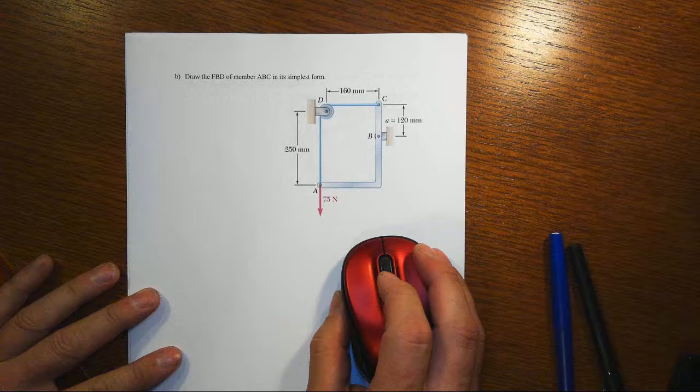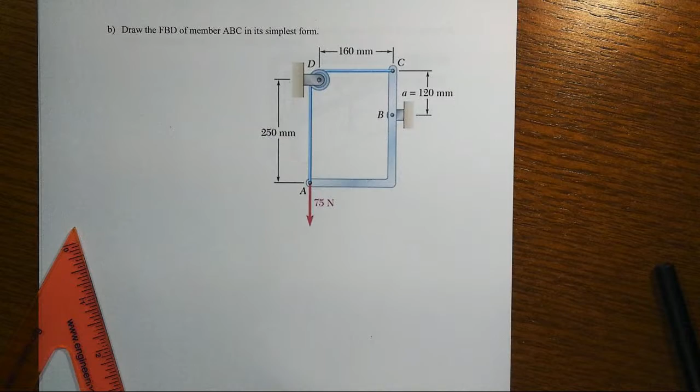Okay, in this item we're going to draw the free body diagram of member ABC in its simplest form. Now note, we have this cable that wraps around the pulley, and we're going to assume that the diameter of the pulley is negligible.

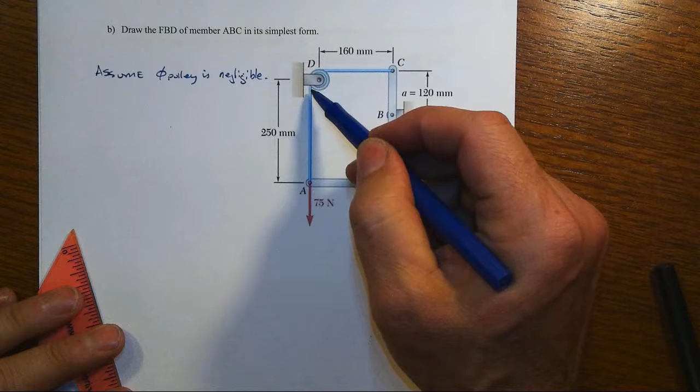Negligible. Why? Well, because look at the dimensions here. We don't know what the pulley size is, and if we don't know what the pulley size is, it makes some of these dimensions, the exact dimensions or the angles of the cable on either side, a little goofy and weird and not so certain what's going on there. So that's why we pretty much have to. We don't have enough information to do anything except for that.

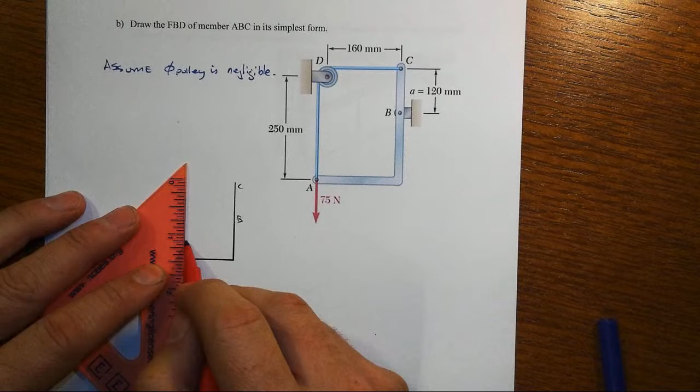Alright, so here's our bracket A, B, C. And we can start off saying, well, I don't know what's simpler and what's not, but what I do know is we've got a 75 Newton force. We have the cable ADC. It has to be in tension, so pulling away from the free body, it's going to have to be the same on both sides. And we've got then BX and BY.

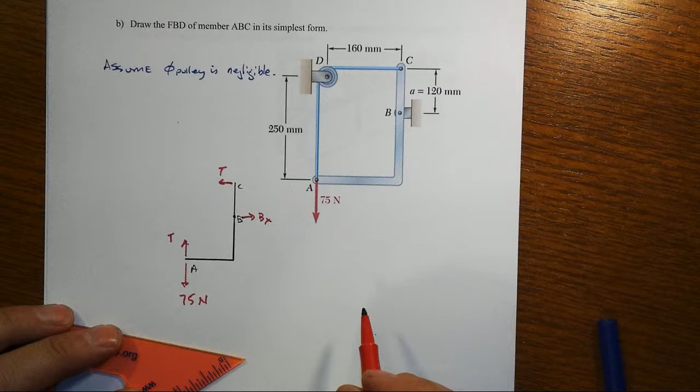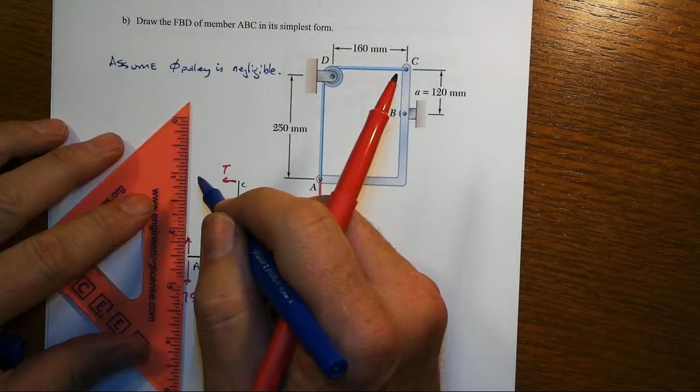Now, T up at C is going to the left, so that means BX has to be going to the right. And I think the resultant of the T and the 75 is still vertical, and this T is horizontal. I think these things, those two have to pass through point D. Now that's why I say we neglect the diameter of the pulley, because that point is somehow lower than that where that force is at.

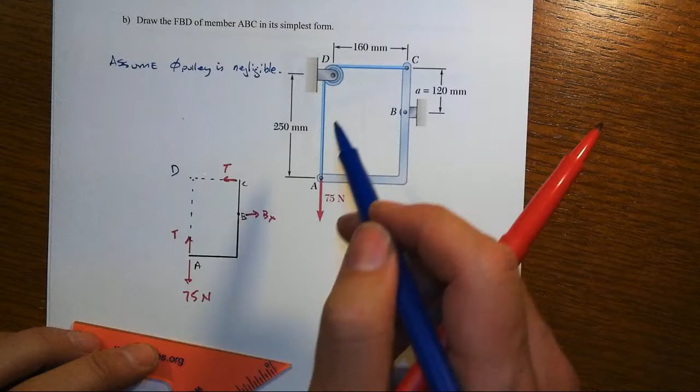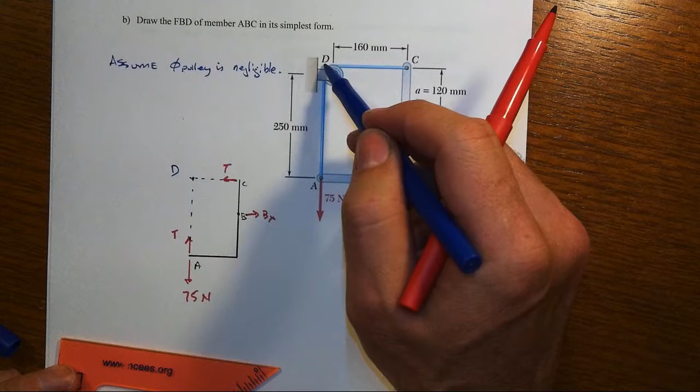So I guess you could argue that 75 and the cable force has to come up here. It really doesn't matter where that point is at. We have to intersect right up here. Again, ignore the diameter of the pulley and then don't have to worry about these kinds of things.

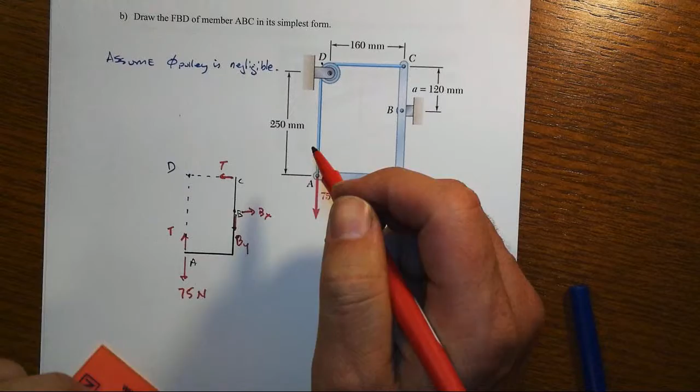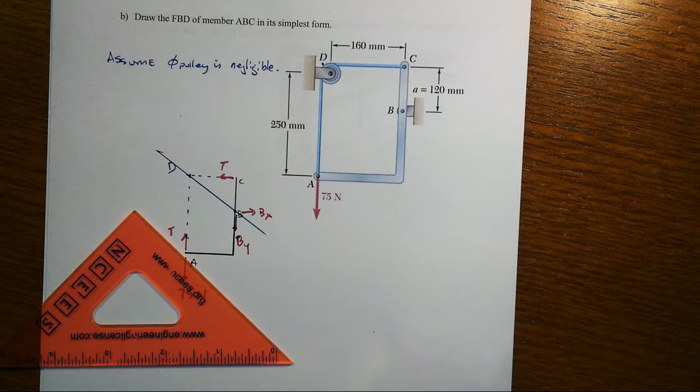But look what's going to happen. BY is going to have to be going down, and because the resultant of BX and BY must follow the straight line that's between B and D. This is a three-force system, in other words. Force down here, a net force that's different than the one here. Their lines of action intersect at D. These two resolve into a single force, three-force system.

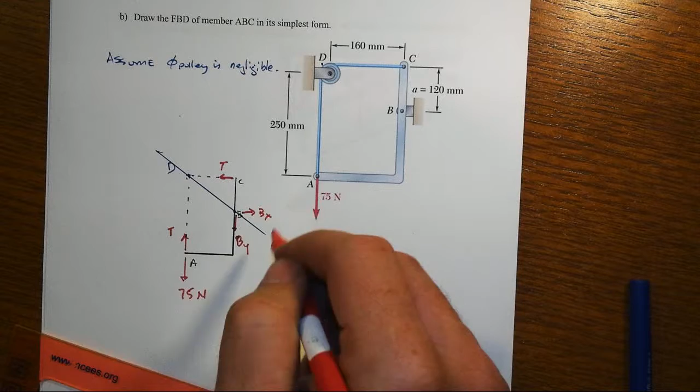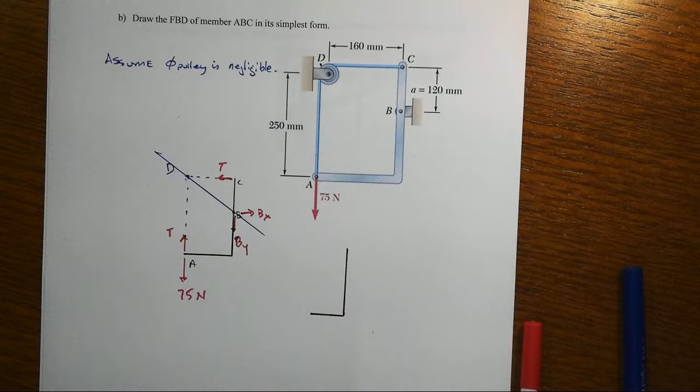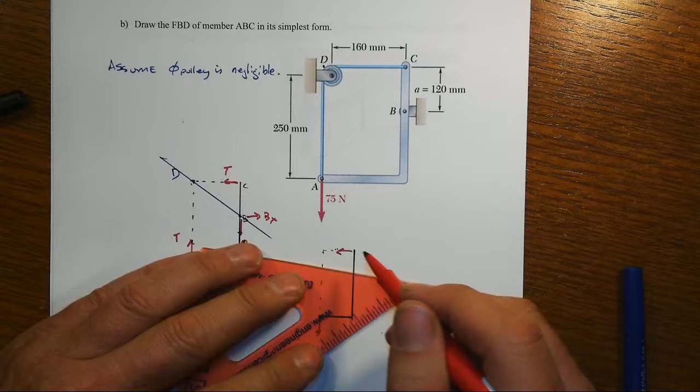If those don't, then when I sum moments about that point D, that whole thing is going to somehow spin. So the simplest model, I guess, let's just put it into a tight little answer, is going to look something like this. I'll have some sort of net force here. Don't know what it is. Have a net force here. Don't know what it is. And I'll have a net or resultant force at B

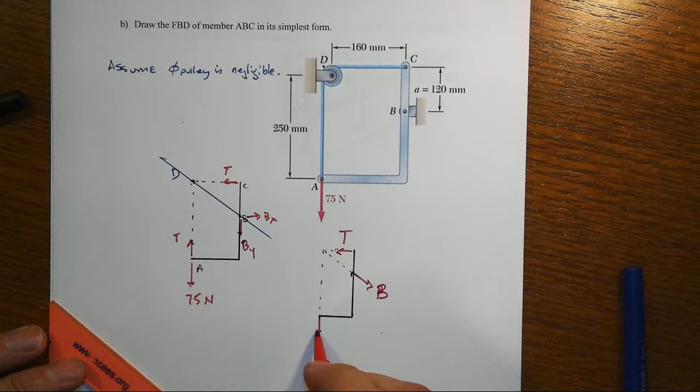like this. That would be at B, and T up at the top, and this will be 75 minus T down here at the bottom.